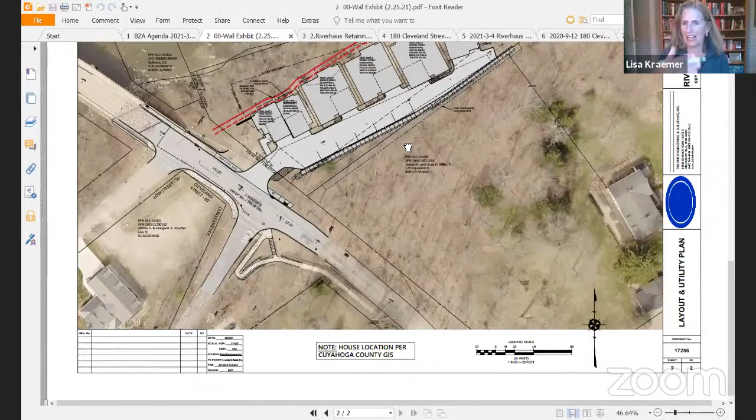Rob, when you talk about the 5 foot, so you say that it's 5 foot over the property line at the base, and then does it angle back somehow? Yeah, and the developer can probably speak more to it.

Okay, you can see a little bit here on these schematics. You'll see this is the way that the wall is constructed. So you have the top piece where the dirt and everything will come right up to the top facing, but yet you have several feet of wall that goes beyond, that gives it the mass and the support to give it its long-term strength. That includes the mass extenders and the overall stone base.

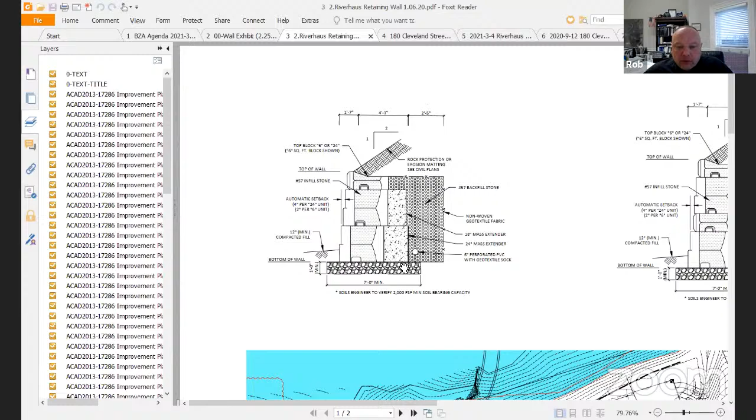So this says 7 feet, but that 7 feet is the foot of stone base that's underneath the wall. So when you look at the actual area of the wall that extends over the line, this is what we're looking at. This is showing the entire thickness of the wall and the easement area.

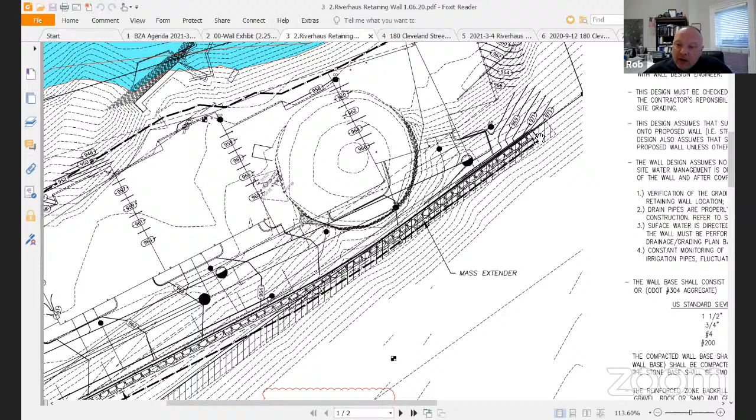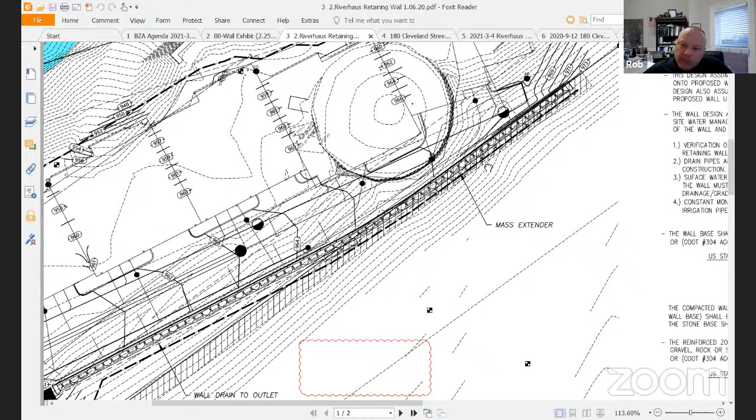The easement area is the shaded, hashed-out area, which is the 7-foot area. Hey Rob, I got a drawing that looks marked up and shows the property line and the 7-foot easement. I don't know if you have that. I do have several different documents here, let me see what I can find.

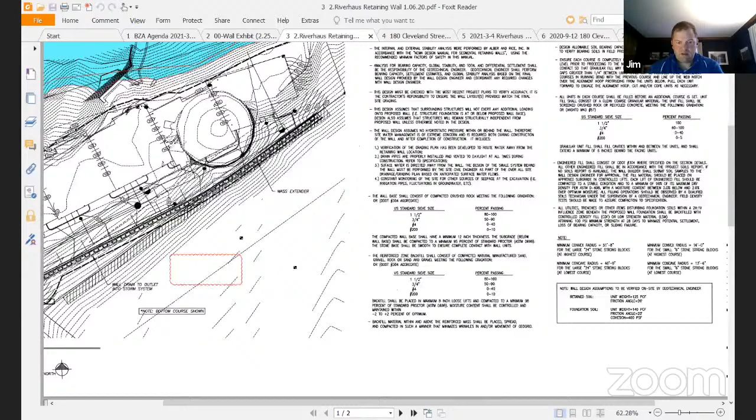Couple different ones here to show, give me a minute. This is the one that I have. I think it's pretty helpful to show where the property line and the easement are.

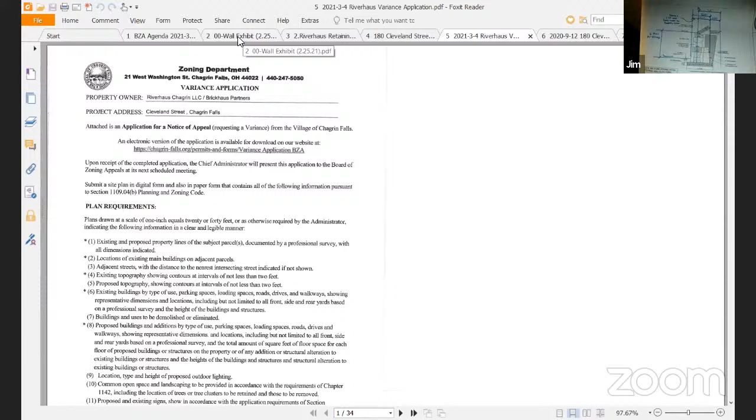What's the mass extender made out of? I am not completely sure, but I'm sure it's a stone product. I think the developer can probably answer that in further detail. I did review that, but I can't remember.

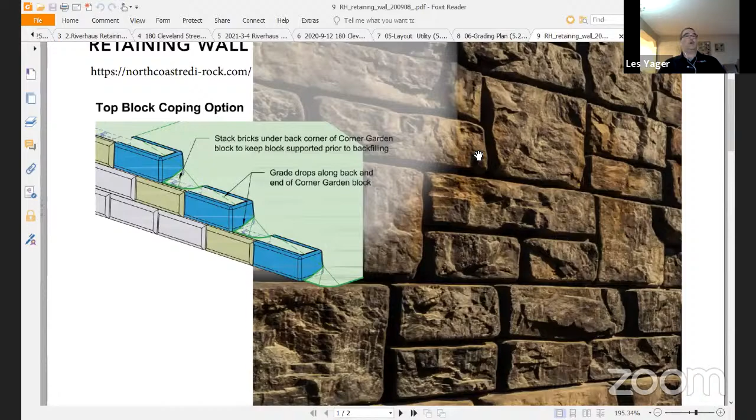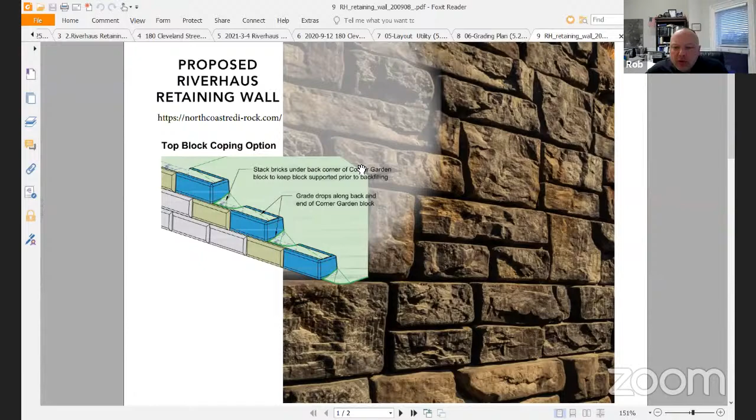There was a question earlier about the construction of the blocks for this. These are all precast block units. The mass extenders, which help stabilize the entire form, once these precast blocks are set in place, are filled with concrete to create the mass extender for the wall. Oh, okay. Maybe some of what I'm sharing here shows what this looks like. If this is correct, Les and Alexander, let me know if there's anything we changed. That is correct. Okay.

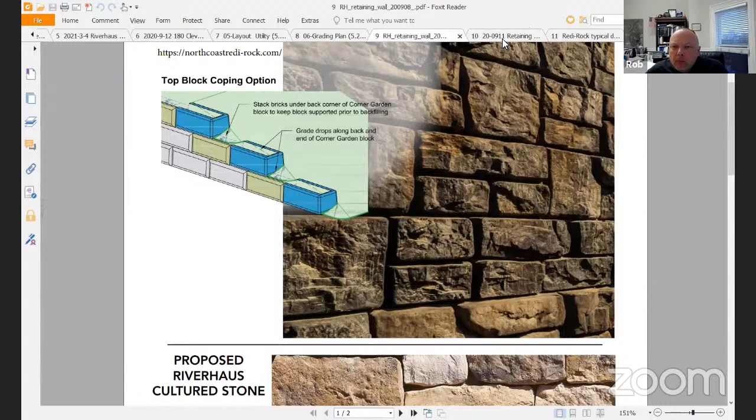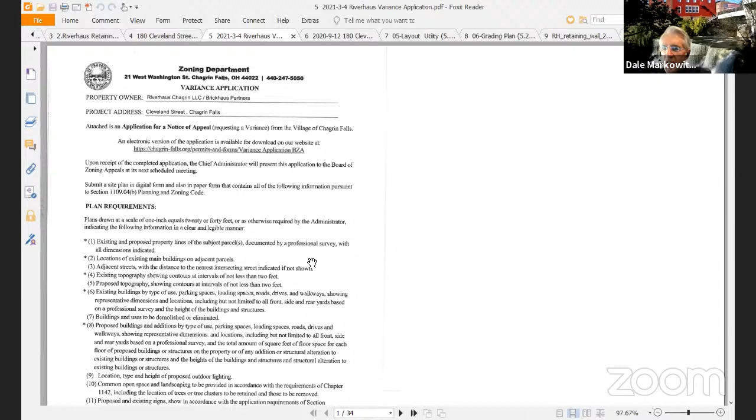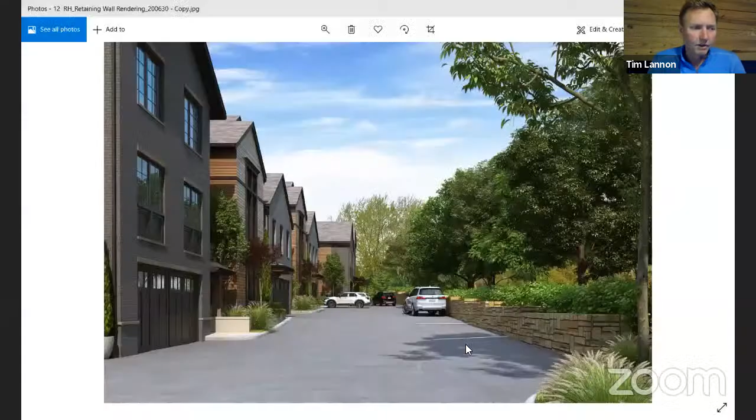I do. Thanks, Tim. Tell us about your involvement with this project and where you stand on the wall. Well, I've been reviewing it on behalf of the village for the year and a half that the proposals have been presented. There's been a retaining wall throughout all of the different submittals. As you know, there was a block wall and a partial section of concrete wall initially because of the zero setback initially presented, and now there's the block wall to be continuous throughout the project.

You have to speak engineer for dummies for me. Do you prefer one style of wall over the other? Where did you come out on this particular, the block wall? In this case, we've built both types around the village, for the village. Block wall is, in my mind, they're equal in this regard. Structurally, to support the hillside, this is perfectly acceptable to the village. That's my opinion, as was the cement wall.

Correct. Tim, can you repeat that last answer? You broke up on me, sorry. You said something was better, but this is suitable for use in the village? No, I said that these are equal in this regard. We've built both types and it depends on situations. In this case, I'd consider them equal. This one has a shallower foundation. I won't even get into aesthetics, but structurally, I find this acceptable.

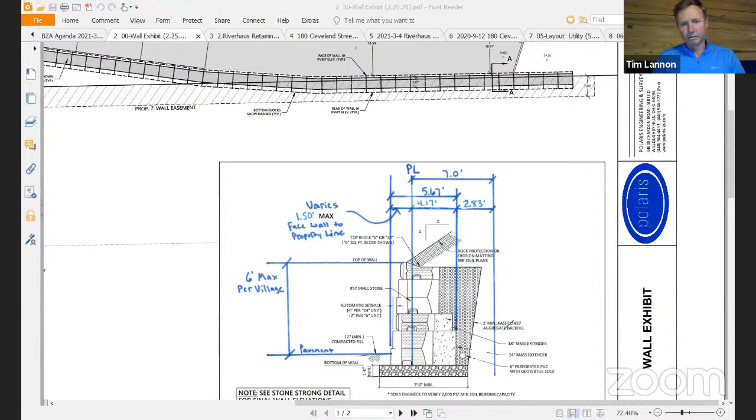Okay, and is the drainage suitable? The 6-inch perforated pipe, is that a suitable thing for a wall of this length? Yeah, that's fine. A block wall would let any excess water bleed through the wall if it had to, as well, where that concrete-like wall is usually impervious. From everything I know about retaining walls, which is very little, it's usually water that is the end of them.

No, so to me, property line, we gave them a 7 foot extension. Yep, 7 feet, we already gave them, so about there. So the only part that's any different is this section over here, and that's not even above ground. No, no, we gave them a variance to allow them to build it on the property line. Right. Oh, okay, I see, to the left over there. Yeah, so everything in this image, everything that you see on the right-hand side is going to be, A, not on their property, and B, they need a variance now for it.

And this picture is a vertical slice or a top-down look, which way is it? Looking from the side? It's a cross-section view. It's a cross view, correct? Yes, that's correct. Okay. So my point is, much of this 7 feet is going to be covered by brush and other backfill landscaping. If you go back to the rendering, I guess I'm unclear of where the retaining wall is starting versus where it was planned to be before.

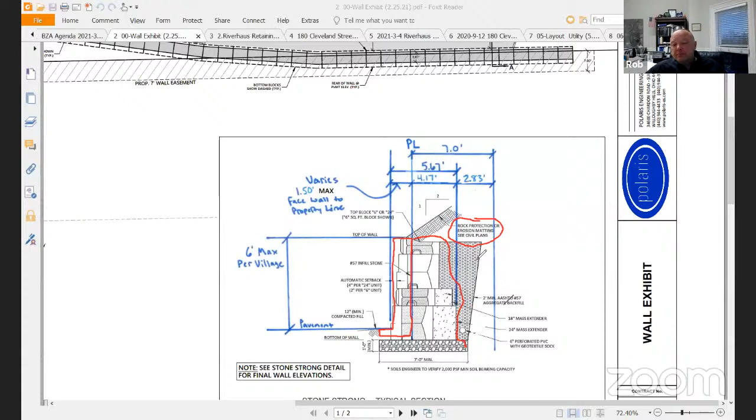So will that put this project within 1 foot of the easement? In other words, if you're adding on another 5 feet or so, yeah, it'll put it about 1 foot from the easement, and that includes the disturbance area, which is this section here. So it's actually going to be a little less than the easement width. And that's also only where we have these base stones, and they're at a few locations.

Yeah, this is where the hill continues, and the greenery.

In the original wall, the reason you got the easement is because the original wall needed that to construct it. So you're going into the easement to construct the original wall. Now you're still going into the easement the same distance, or maybe a little more, a little less, but you're just leaving stone there instead of whatever you were going to backfill it with. Correct. So the appearance when it's said and done, it's going to look the same. It's just going to be nicer if you like this look. But yeah, it's not going to really change.

Right, and of course, if we recall, the previous easement required this space because we need the room in the driveway to make sure they have appropriate access. So we had to discuss them moving the wall, and of course that starts to move everything. So we understand the domino effect, that it's not a feasible option to move the location of where this has to start. So they're minimizing that ability by doing this.

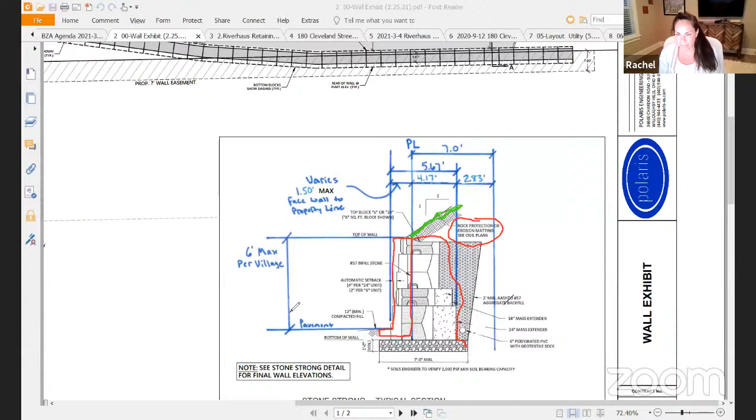And so the rendering that we see is still accurate in the look of how it's going to be. Okay, unless I misunderstood what Tim said, it strikes me that this is not more engineeringly significant than the precast slab. It seems to be taking much more substance into the hill. But did I mishear you, Tim? Or, from your standpoint, does this provide no further protection for the wall, for the hillside, than the previously approved plan? Correct.

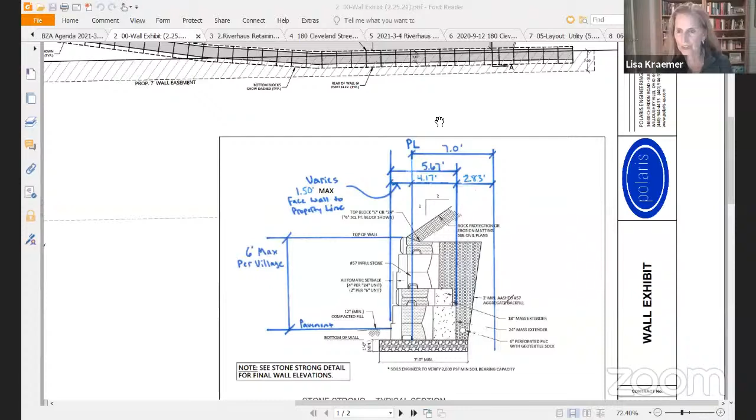So this is strictly related to aesthetics, maintenance, and the preferred structure of the builder. It's not a structurally better retaining wall, more stable or anything like that. I think both are engineered to protect the slope. It's down the road, the maintenance, and how the concrete wall is gonna perform as opposed to the stones.

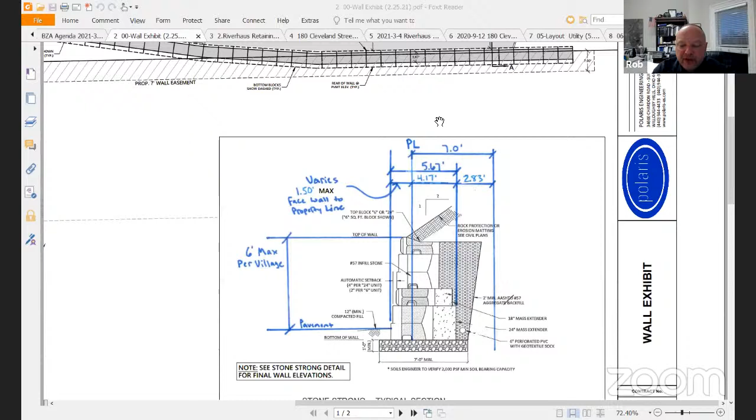And did ARB weigh in on a preference? They did not, we didn't take it to ARB because there was no material change to the appearance of the wall. The wall height, the wall facing was still the same. So from the aesthetic perspective, we felt it didn't need to go back to ARB. They don't weigh in on construction methods.

Okay, I just was wondering because the aesthetics are changing, right? The first portion of the wall is stone, so we continue it until the end. What you saw on the image is still the stone that's at the beginning of the project of the driveway. Remind me how far that was proposed to go back before the concrete started. Rob, you can help me here, but I think the whole wall, the length of the whole wall is approximately 200 feet, and that portion was about 75 feet.

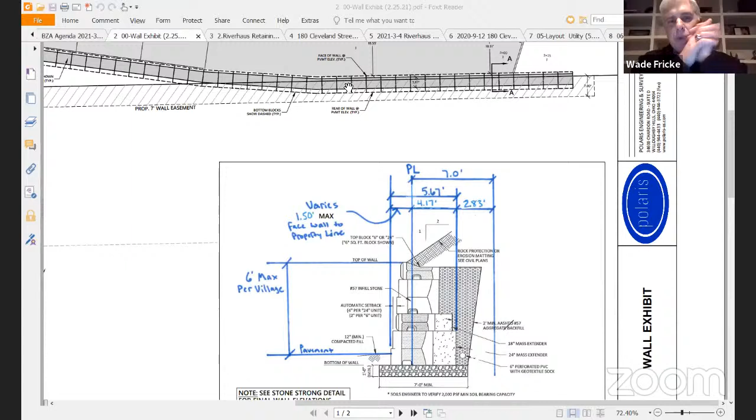Rob, can you bring back the picture that shows the finished product with the landscaping on top? The rendering? Yes. Oh, the picture, yeah, hold on.

So can you describe on this rendering where 75 feet is? It's somewhere after the white car, between residences 5 and 6 on the plan. So it's really further back. Gotcha.

Okay, questions from the board? We've got lots of people that have commented on behalf of the application and answered some questions, but I want to make sure everyone gets their questions answered. Okay, we're good.

Christy, can you see if anybody is in the crowd, in the audience waiting to speak, please? Yes, we have one member of the public in attendance by the name of David Herdman. David, if you would like to speak for or against the project, please use your raise the hand function in Zoom to let us know you'd like to speak.

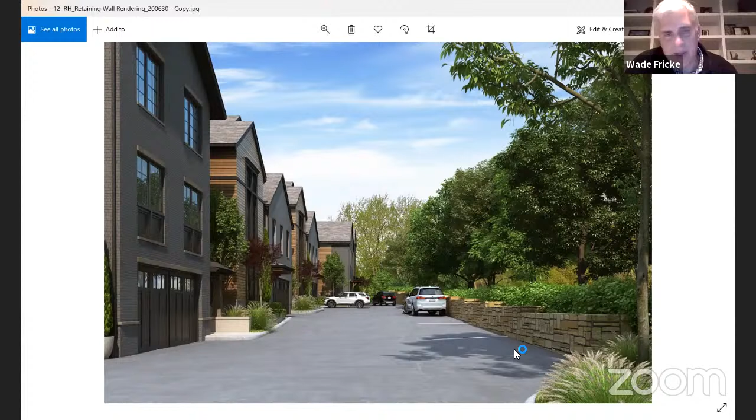Board, while we're waiting, final time for the audience participation, if any. Is there any other question of anyone who's spoken thus far? All right, Christy, we'll circle back one more time. No one wishing to participate? That's correct.

All right, I think we're up to that point in time when we take a motion in the affirmative and then we'll vote aye or nay to that. Is someone doing the motion? Oh, I can. Do you want me to? Got it. Please, Rachel. You're wonderful. Thank you. I know. Okay.

I would like to make a motion. I was ready, just waiting. Okay, I'd like to make a motion in regards—sorry, let me get the official application here. All right, I'd like to make a motion on behalf of Riverhaus Brickhouse Partners submitting a variance to their parcel located on Cleveland Street, which is a residential development.

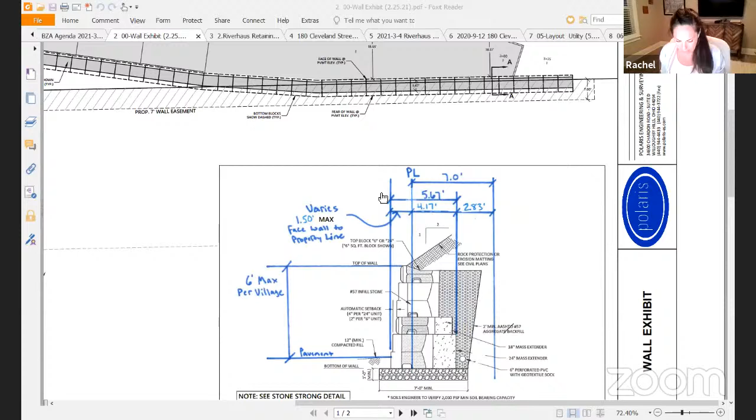Involving a variance to section 1148.07C, which requires all retaining walls to be 3 feet away from a property line, and 1 foot in addition for every foot over 3 feet. Since this wall is going to be 6 feet tall, the wall would normally have to be 6 feet away from the property line. In regards to where this retaining wall needs to be in order to allow for appropriate traffic in and out of this property site, the front facing part of the retaining wall must be on the property line. The engineering for this proposed retaining wall then goes 7 feet beyond the property line into an approved and executed easement for access rights to this owner, which would be then requesting essentially a 13-foot variance for this retaining wall. That number's right?

13 feet? Okay, I think it's 11-foot. It's 11. How is it 11 foot if it needs to be 6 and then they go 7 feet into the thing? That's why I didn't understand. No, why—7 feet is the easement, not the variance. It normally would be 6 feet and that would be on the property line. It has to be 6 feet according to 1148.07. Right. And I think it goes—Rob, can you answer this?

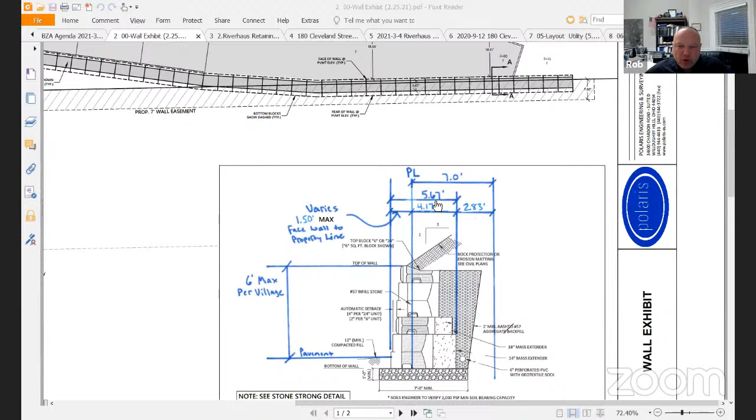It would have to be 6 feet away, so 6 feet plus—it would be no greater than 12 feet, including the decimal point, the 0.67. It's 11 something, yeah, 11.67. Okay, so you're not counting that 2.83 feet? No, because the wall itself—this is gravel base and I can only count a structure. So the structure would be the back of the mass extender, which is 5.67. It was measured out at 5 foot before, but with this more precise dimension, 5.67 is correct. So the variance will be the 6 feet plus the 5.67 feet, so 11.67 feet to be exact. Yes. Okay.

As discussed previously, the property cannot be built without the location of the retaining wall in this exact location. There have been several review sessions discussing the domino effect of moving the wall, moving the driveway, moving the units. This is the only feasible way to structure the property with allowable traffic, as well as structurally engineering to protect the hillside at this location.

The variance may seem substantial, but the builder has executed an easement with the property owner. The property owner has been working with this owner, and the property owner next to this property has been working together in partnership to make sure everybody's in agreement on the location.

The look and feel of the wall will be no different than the previous variance granted, but the underearth and foundation of this retaining wall is the part that's going to be used in the variance. So the aesthetic look and feel and the impact on the completed product will have no further impact than what was already approved in previous variances. The essential character of the neighborhood would be supported because of the design integrity of the wall, matching more of the architectural style, as well as a better aesthetic. It's an upgrade to the look and feel rather than poured concrete. It's now block stone looking.

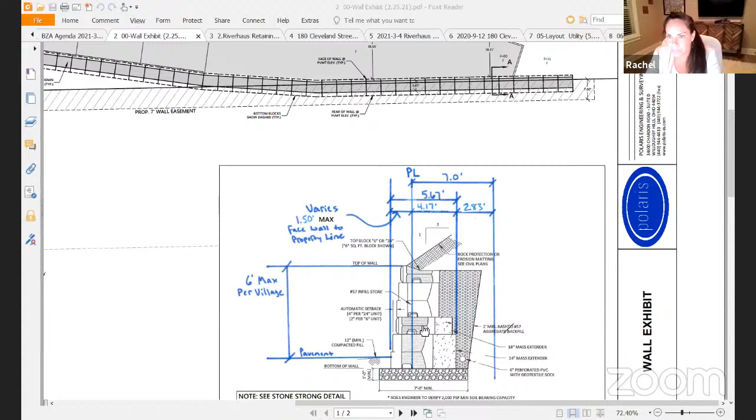To the applicant, you're probably well aware of the process at this point. Council has 15 days for 3 members of council to petition to hear this. There's a 4-to-1 vote, with the 1 being a member of council, so who knows whether that will happen. But if 15 days pass without an appeal, your variance will be granted. If not, you'll be getting notice either way from Rob about next steps. So 15 days will be the benchmark as to whether you'll be appealed to council or whether you'll have your variance.